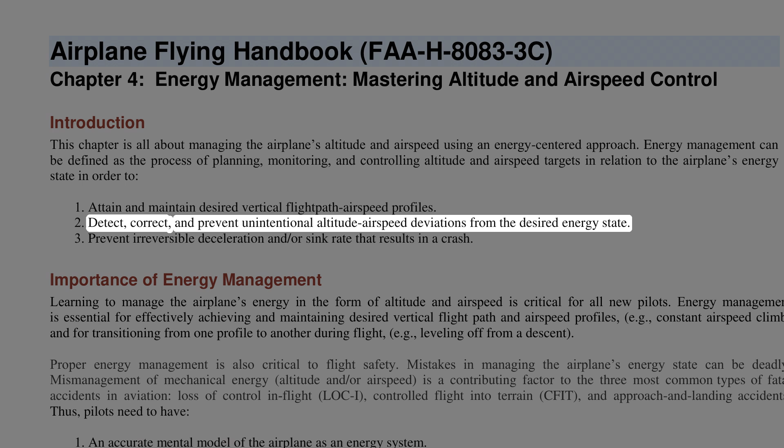Introduction. This chapter is all about managing the airplane's altitude and airspeed using an energy-centered approach. Energy management can be defined as the process of planning, monitoring, and controlling altitude and airspeed targets in relation to the airplane's energy state, in order to attain and maintain desired vertical flight path and airspeed profiles, detect, correct, and prevent unintentional altitude and airspeed deviations from the desired energy state, and prevent irreversible deceleration and/or sink rate that results in a crash.

Importance of energy management. Learning to manage the airplane's energy in the form of altitude and airspeed is critical for all new pilots. Energy management is essential for effectively achieving and maintaining desired vertical flight path and airspeed profiles, e.g., constant airspeed climb, and for transitioning from one profile to another during flight, e.g., leveling off from a descent.

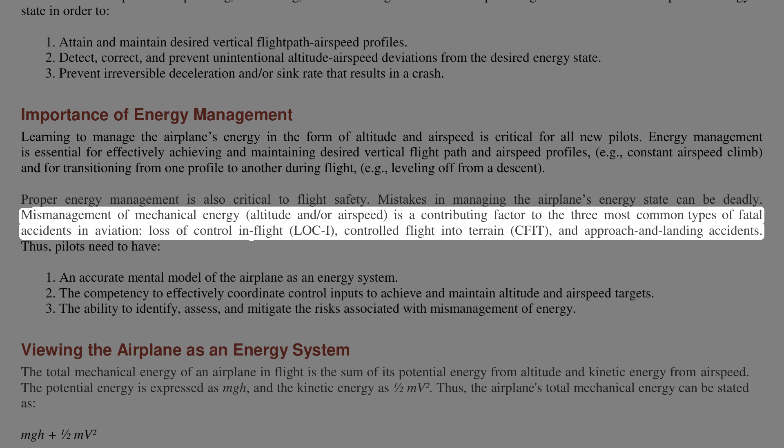Proper energy management is also critical to flight safety. Mistakes in managing the airplane's energy state can be deadly. Mismanagement of mechanical energy, altitude and/or airspeed, is a contributing factor to the three most common types of fatal accidents in aviation: loss of control in flight (LOC-I), controlled flight into terrain (CFIT), and approach and landing accidents.

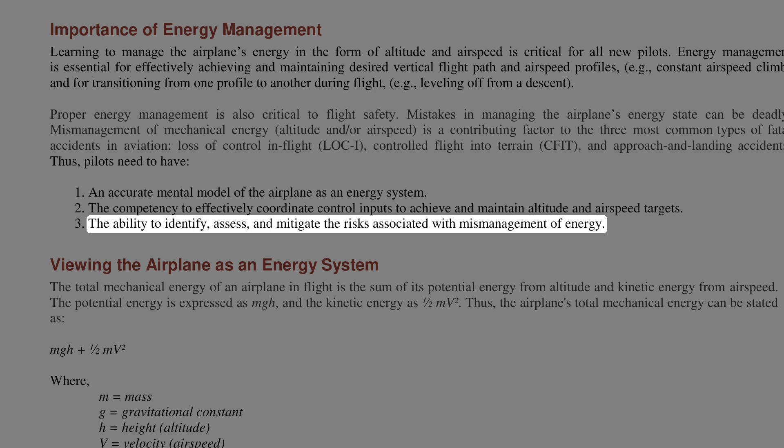Thus, pilots need to have: 1. An accurate mental model of the airplane as an energy system. 2. The competency to effectively coordinate control inputs to achieve and maintain altitude and airspeed targets. 3. The ability to identify, assess, and mitigate the risks associated with mismanagement of energy.

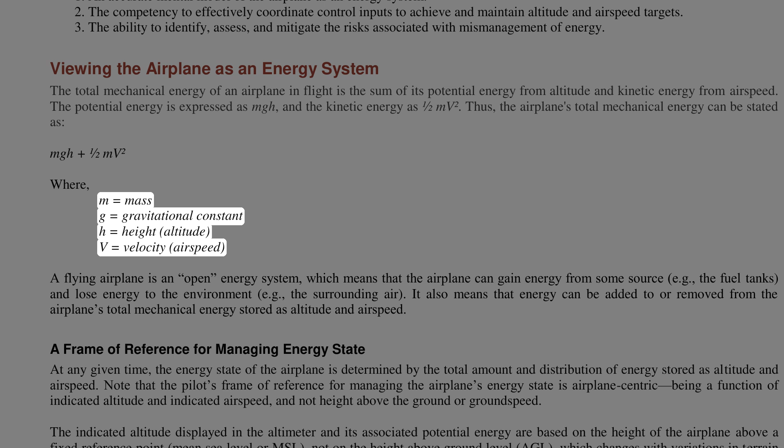Viewing the airplane as an energy system, the total mechanical energy of an airplane in flight is the sum of its potential energy from altitude and kinetic energy from airspeed. The potential energy is expressed as mgh, and the kinetic energy as half mv squared. Thus, the airplane's total mechanical energy can be stated as mgh plus half mv squared, where m equals mass, g equals gravitational constant, h equals height (altitude), and v equals velocity (airspeed).

A flying airplane is an open energy system, which means that the airplane can gain energy from some source, e.g., the fuel tanks, and lose energy to the environment, e.g., the surrounding air. It also means that energy can be added to or removed from the airplane's total mechanical energy stored as altitude and airspeed. A frame of reference for managing energy state.

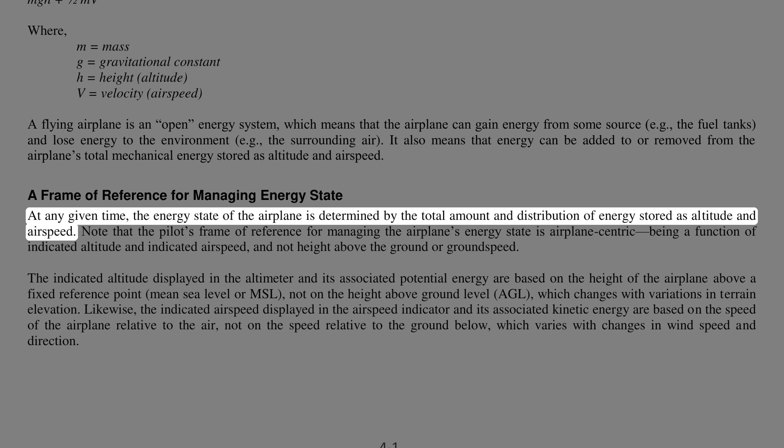At any given time, the energy state of the airplane is determined by the total amount and distribution of energy stored as altitude and airspeed. Note that the pilot's frame of reference for managing the airplane's energy state is airplane-centric, being a function of indicated altitude and indicated airspeed, and not height above the ground or ground speed.

The indicated altitude displayed in the altimeter and its associated potential energy are based on the height of the airplane above a fixed reference point, mean sea level or MSL, not on the height above ground level, AGL, which changes with variations in terrain elevation.

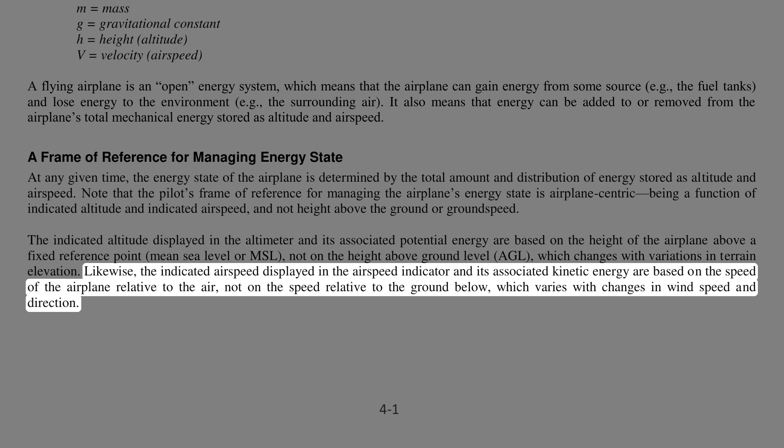Likewise, the indicated airspeed displayed in the airspeed indicator and its associated kinetic energy are based on the speed of the airplane relative to the air, not on the speed relative to the ground below, which varies with changes in wind speed and direction. Note that changes in indicated altitude and airspeed are attained through forces resulting from the pilot's direct manipulation of the controls.

These direct control inputs determine the airplane's ability to climb, descend, accelerate, or decelerate. In contrast, changes in AGL altitude and ground speed are affected by external factors, such as varying terrain elevation and wind, which the pilot cannot alter.

Of course, the pilot should manipulate the airplane's energy in such a way as to minimize any risks associated with terrain or wind. For example, the pilot may seek to manipulate energy state so as to maximize the airplane's energy gains and minimize energy losses when faced with rising terrain. A safer heading may also be an option.

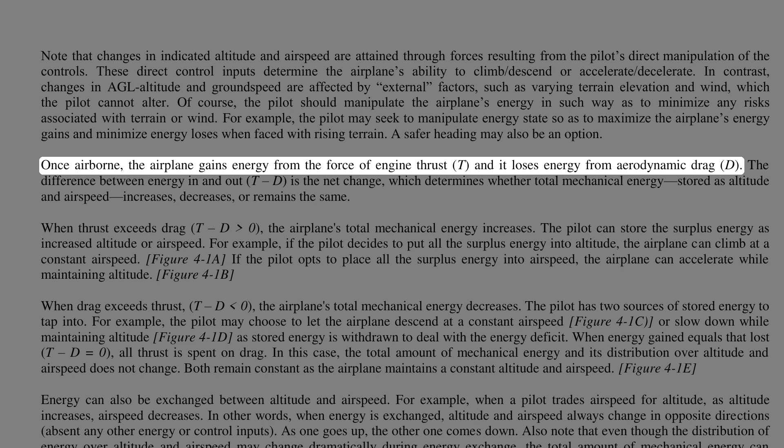Once airborne, the airplane gains energy from the force of engine thrust, T, and it loses energy from aerodynamic drag, D. The difference between energy in and out, T minus D, is the net change, which determines whether total mechanical energy, stored as altitude and airspeed, increases, decreases, or remains the same.

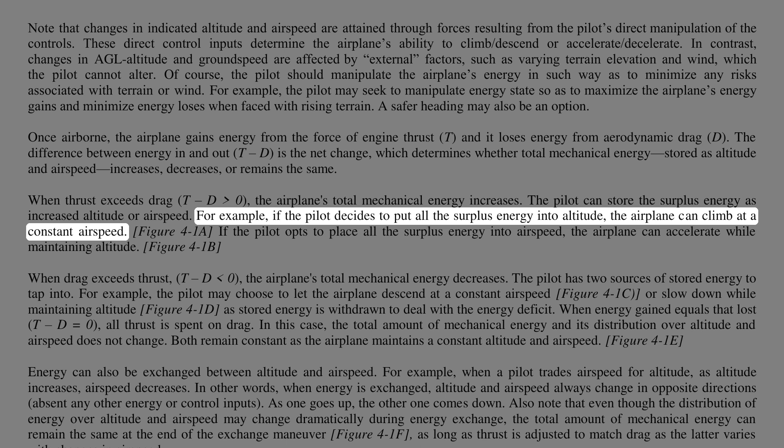When thrust exceeds drag, T minus D greater than 0, the airplane's total mechanical energy increases. The pilot can store the surplus energy as increased altitude or airspeed. For example, if the pilot decides to put all the surplus energy into altitude, the airplane can climb at a constant airspeed. If the pilot opts to place all the surplus energy into airspeed, the airplane can accelerate while maintaining altitude.

When drag exceeds thrust, T minus D is less than zero, the airplane's total mechanical energy decreases. The pilot has two sources of stored energy to tap into. For example, the pilot may choose to let the airplane descend at a constant airspeed, or slow down while maintaining altitude, as stored energy is withdrawn to deal with the energy deficit.

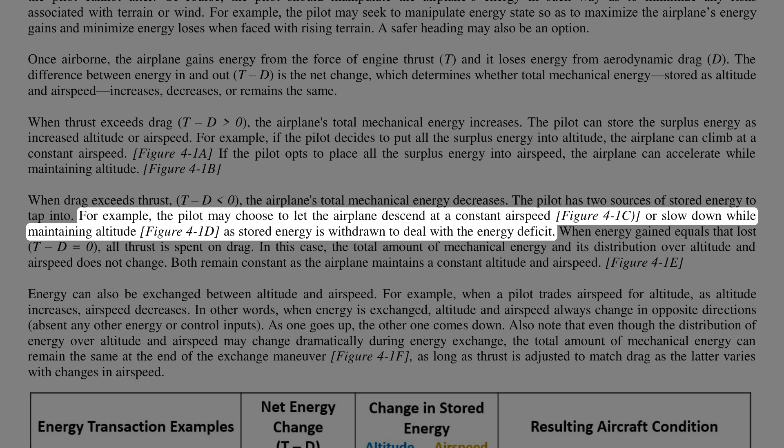When energy gained equals that lost, T minus D equals zero, all thrust is spent on drag. In this case, the total amount of mechanical energy and its distribution over altitude and airspeed does not change. Both remain constant as the airplane maintains a constant altitude and airspeed.

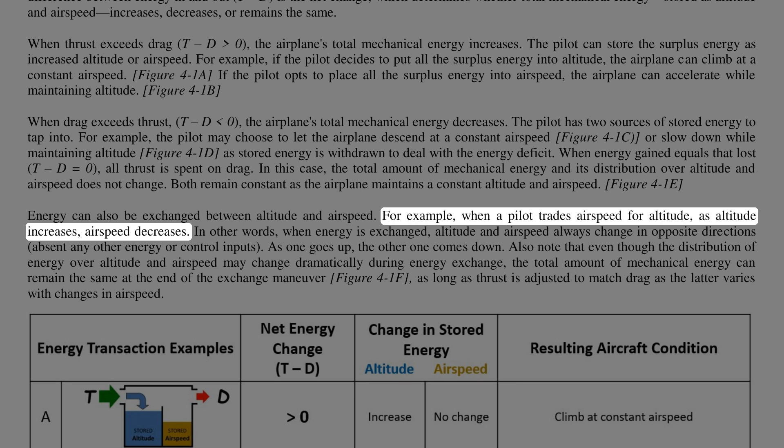Energy can also be exchanged between altitude and airspeed. For example, when a pilot trades airspeed for altitude, as altitude increases, airspeed decreases. In other words, when energy is exchanged, altitude and airspeed always change in opposite directions, absent any other energy or control inputs. As one goes up, the other one comes down.

Also note that even though the distribution of energy over altitude and airspeed may change dramatically during energy exchange, the total amount of mechanical energy can remain the same at the end of the exchange maneuver, as long as thrust is adjusted to match drag as the latter varies with changes in airspeed.

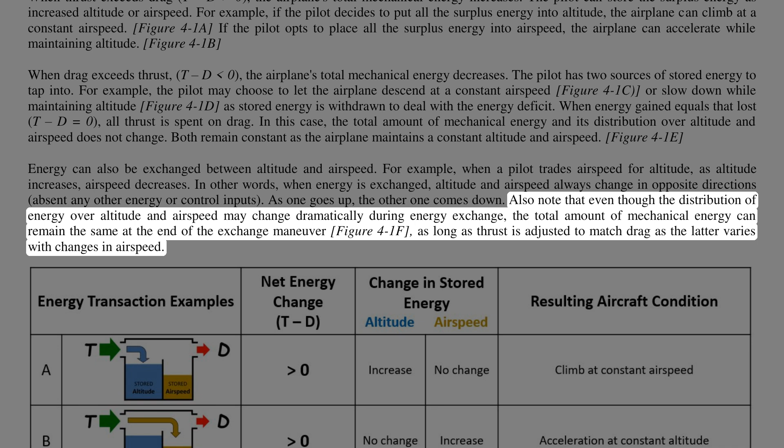Since the airplane gains energy from engine thrust, T, and loses energy through aerodynamic drag, D, energy flows continuously into and out of the airplane while in flight. Usually measured as specific excess power, Ps, or rate of energy change, the net energy flow is a direct function of the difference between thrust and drag.

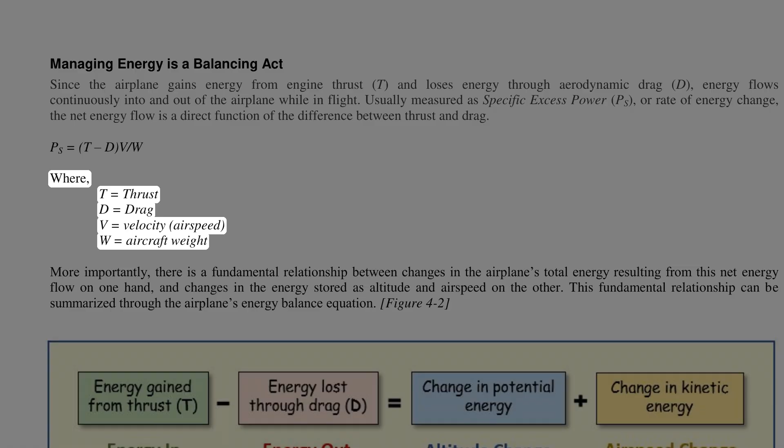Ps equals (T minus D) times V divided by W, where T equals thrust, D equals drag, V equals velocity or airspeed, W equals aircraft weight. More importantly, there is a fundamental relationship between changes in the airplane's total energy resulting from this net energy flow on one hand, and changes in the energy stored as altitude and airspeed on the other.

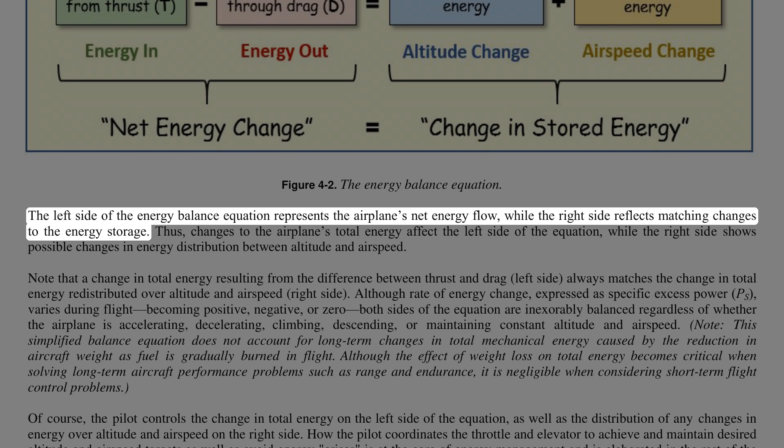This fundamental relationship can be summarized through the airplane's energy balance equation. The left side of the energy balance equation represents the airplane's net energy flow, while the right side reflects matching changes to the energy storage.

Thus, changes to the airplane's total energy affect the left side of the equation, while the right side shows possible changes in energy distribution between altitude and airspeed. Note that a change in total energy resulting from the difference between thrust and drag, left side, always matches the change in total energy redistributed over altitude and airspeed, right side.

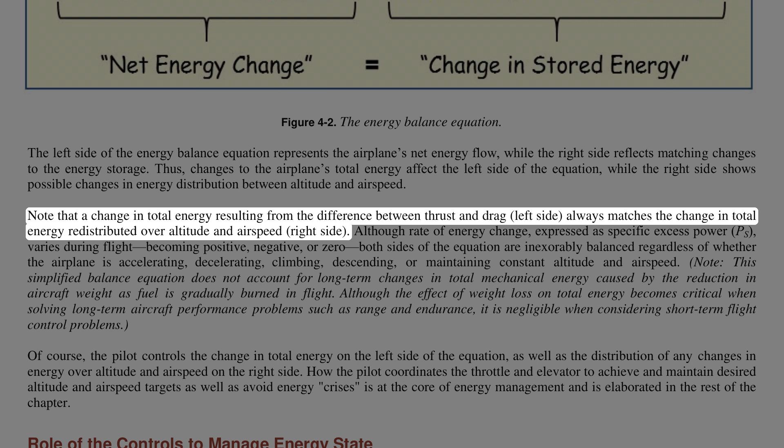Although rate of energy change, expressed as specific excess power, Ps, varies during flight, becoming positive, negative, or zero, both sides of the equation are inexorably balanced regardless of whether the airplane is accelerating, decelerating, climbing, descending, or maintaining constant altitude and airspeed. Note: this simplified balance equation does not account for long-term changes in total mechanical energy caused by

the reduction in aircraft weight as fuel is gradually burned in flight. Although the effect of weight loss on total energy becomes critical when solving long-term aircraft performance problems such as range and endurance, it is negligible when considering short-term flight control problems.

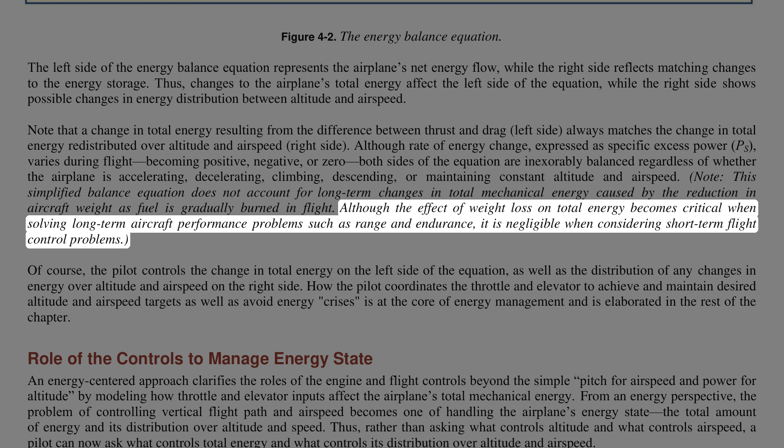Of course, the pilot controls the change in total energy on the left side of the equation, as well as the distribution of any changes in energy over altitude and airspeed on the right side. How the pilot coordinates the throttle and elevator to achieve and maintain desired altitude and airspeed targets, as well as avoid energy crises, is at the core of energy management and is elaborated in the rest of the chapter.

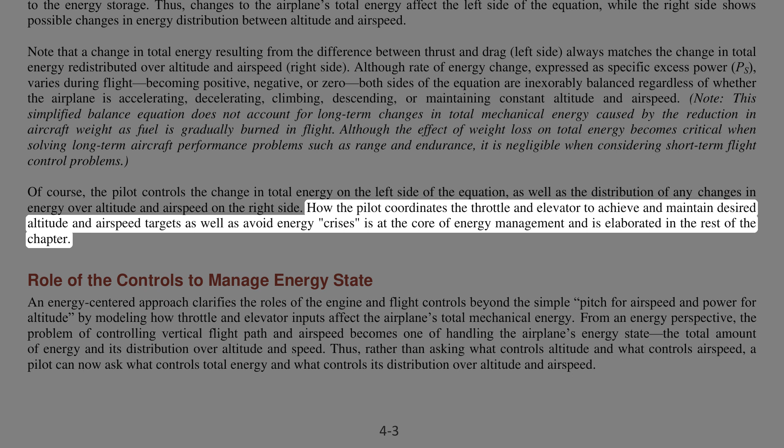Role of the controls to manage energy state.

An energy-centered approach clarifies the roles of the engine and flight controls beyond the simple pitch-for-airspeed and power-for-altitude model, by modeling how throttle and elevator inputs affect the airplane's total mechanical energy. From an energy perspective, the problem of controlling vertical flight path and airspeed becomes one of handling the airplane's energy state, the total amount of energy and its distribution over altitude and speed.

Thus, rather than asking what controls altitude and what controls airspeed, a pilot can now ask what controls total energy and what controls its distribution over altitude and airspeed.

Primary energy role of the throttle and elevator.

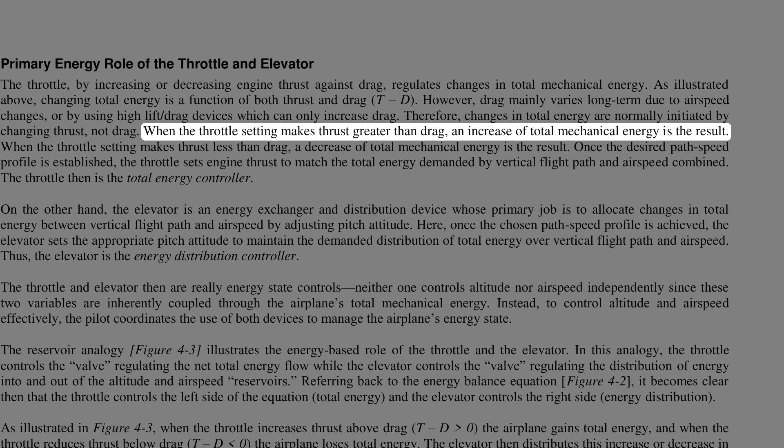The throttle, by increasing or decreasing engine thrust against drag, regulates changes in total mechanical energy. As illustrated above, changing total energy is a function of both thrust and drag, T minus D. However, drag mainly varies long-term due to airspeed changes or by using high-lift drag devices, which can only increase drag. Therefore, changes in total energy are normally initiated by changing thrust, not drag. When the throttle setting makes thrust greater than drag, an increase of total mechanical energy is the result.

When the throttle setting makes thrust less than drag, a decrease of total mechanical energy is the result. Once the desired path speed profile is established, the throttle sets engine thrust to match the total energy demanded by vertical flight path and airspeed combined. The throttle then is the total energy controller.

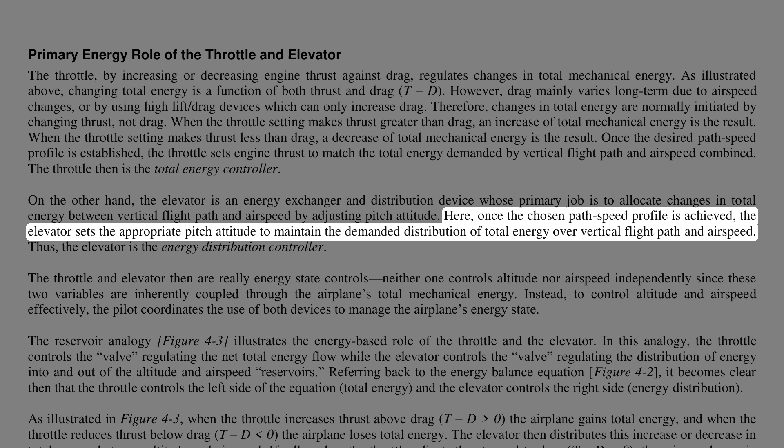On the other hand, the elevator is an energy exchanger and distribution device whose primary job is to allocate changes in total energy between vertical flight path and airspeed by adjusting pitch attitude. Once the chosen path speed profile is achieved, the elevator sets the appropriate pitch attitude to maintain the demanded distribution of total energy over vertical flight path and airspeed. Thus, the elevator is the energy distribution controller.

The throttle and elevator then are really energy state controls. Neither one controls altitude nor airspeed independently, since these two variables are inherently coupled through the airplane's total mechanical energy. Instead, to control altitude and airspeed effectively, the pilot coordinates the use of both devices to manage the airplane's energy state. The reservoir analogy illustrates the energy-based role of the throttle and the elevator.

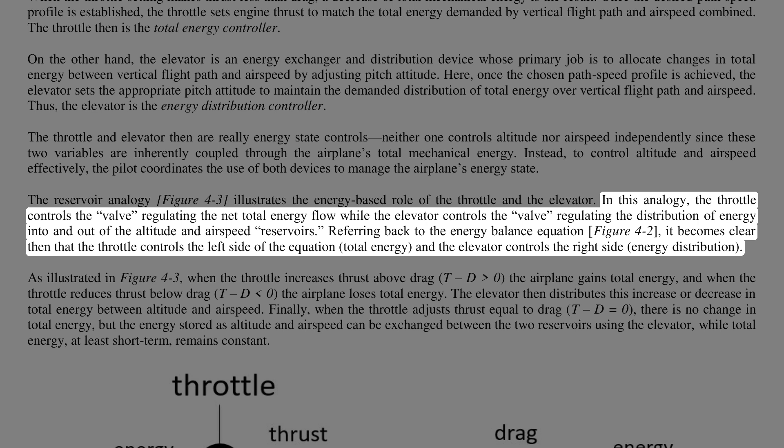In this analogy, the throttle controls the valve regulating the net total energy flow, while the elevator controls the valve regulating the distribution of energy into and out of the altitude and airspeed reservoirs. Referring back to the energy balance equation, figure 4-2, it becomes clear then that the throttle controls the left side of the equation, total energy, and the elevator controls the right side, energy distribution.

As illustrated in figure 4-3, when the throttle increases thrust above drag, T minus D greater than 0, the airplane gains total energy, and when the throttle reduces thrust below drag, T minus D less than 0, the airplane loses total energy. The elevator then distributes this increase or decrease in total energy between altitude and airspeed.

Finally, when the throttle adjusts thrust equal to drag, T minus D equals 0, there is no change in total energy, but the energy stored as altitude and airspeed can be exchanged between the two reservoirs using the elevator, while total energy, at least short-term, remains constant.

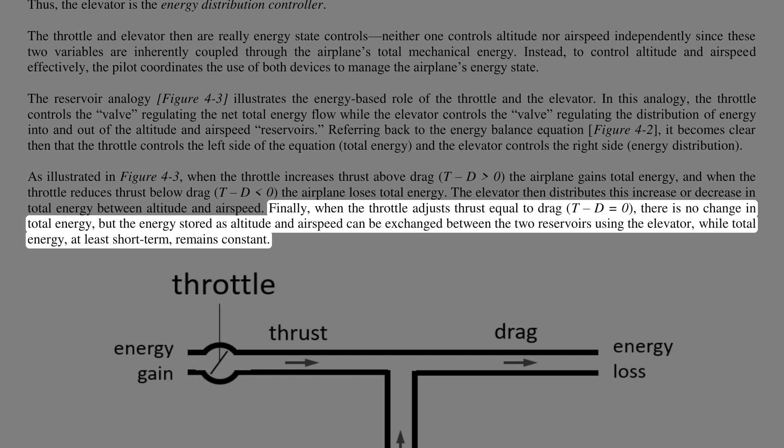Additional role for the elevator. On the front side of the power required curve, where the airplane cruises at high speed, point 1 in figure 4-4, and a low angle of attack, AOA, with little or no excess power or excess thrust.

In figure 4-4, pulling back on the yoke or stick, elevator up, will result in a brief energy exchange climb, causing the airplane to slow down from point 1 to point 2 toward the center of the power curve. This decrease in airspeed results in a reduction in total drag, hence available energy in the form of positive excess power, PS greater than 0, where thrust exceeds drag, T minus D greater than 0. With this excess power at point B in figure 4-4, the airplane can now climb at a constant airspeed or turn in level flight while maintaining a constant airspeed at an increased load factor.

On the backside of the power required curve, where the airplane flies at low speed, point 3 in figure 4-4, and high AOA with little or no excess power or excess thrust, point C in figure 4-4, pushing forward on the yoke or stick, elevator down, will result in a brief energy exchange descent, causing the airplane to accelerate from point 3 to point 2 toward the center of the power curve.

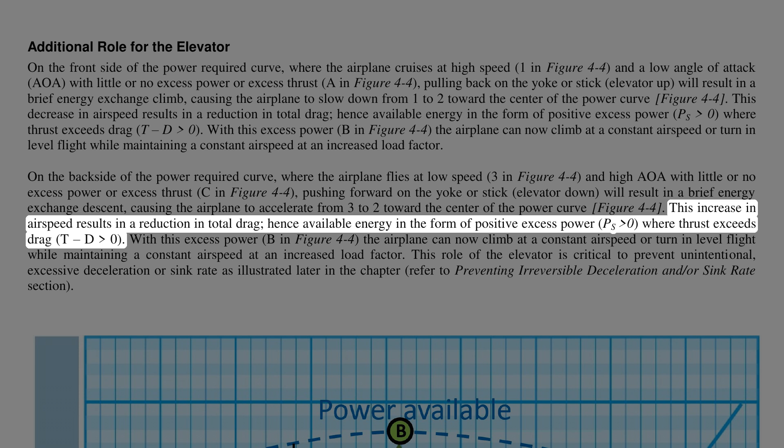This increase in airspeed results in a reduction in total drag, hence available energy in the form of positive excess power, PS greater than 0, where thrust exceeds drag, T minus D greater than 0.

While the elevator can assist the throttle in changing airspeed via energy exchange as described by T minus D and PS above, occasionally the elevator can directly increase the D in T minus D at any given speed during a level turn, thus helping the airplane rapidly bleed off total energy.

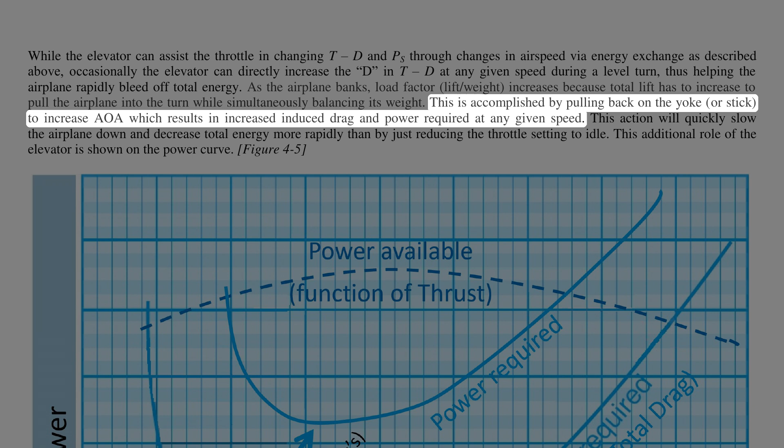As the airplane banks, load factor, lift over weight, increases because total lift has to increase to pull the airplane into the turn while simultaneously balancing its weight. This is accomplished by pulling back on the yoke or stick to increase AOA, which results in increased induced drag and power required at any given speed. This action will quickly slow the airplane down and decrease total energy more rapidly than by just reducing the throttle setting to idle. This additional role of the elevator is shown on the power curve.

Applying the respective role of the controls to manage the airplane's energy state leads to a set of simple rules for proper throttle elevator coordination to effectively control vertical flight path and airspeed.

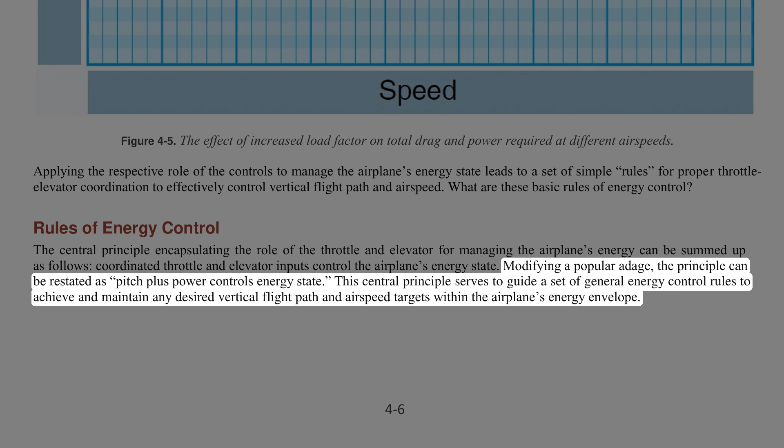What are these basic rules of energy control? The central principle encapsulating the role of the throttle and elevator for managing the airplane's energy can be summed up as follows: coordinated throttle and elevator inputs control the airplane's energy state. Modifying a popular adage, the principle can be restated as pitch plus power controls energy state. This central principle guides a set of general energy control rules to achieve and maintain any desired vertical flight path and airspeed targets within the airplane's energy envelope.

Visualizing the airplane's ability to move between energy states. To better understand the basic rules of energy control, a pilot needs to visualize an airplane's energy state and its ability to switch from one energy state to another. In other words, how does an airplane move from an initial altitude and airspeed to any other target altitude and airspeed within its flight envelope, and how does the pilot control the process?

A map should help, and in this case, it charts the status of the aircraft in terms of energy. In a navigation map, such as an aeronautical sectional chart, the geographic position of an airplane is determined by two variables, latitude and longitude. Likewise, in an altitude-airspeed, or energy, map, the energy position of an airplane, its energy state, is defined by two variables, altitude and airspeed.

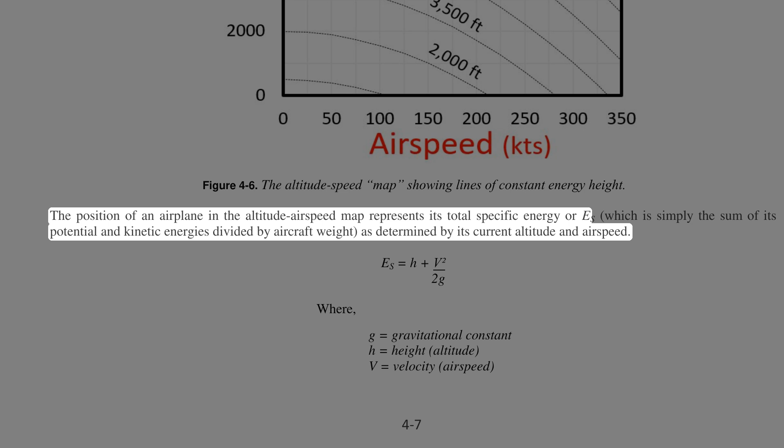The position of an airplane in the altitude-airspeed map represents its total specific energy, or Es, which is simply the sum of its potential and kinetic energies divided by aircraft weight, as determined by its current altitude and airspeed. Where G equals gravitational constant, H equals height (altitude), V equals velocity (airspeed). Since the total specific energy Es has the units of height, e.g. feet, it is usually called energy height. It also gets this name from the fact that energy height is the maximum height that an airplane would reach from its current altitude if it were to trade all its speed for altitude.

Figure 4-6 shows lines of constant total specific energy, or energy height. Different positions of an airplane along a given energy height line have the same total energy regardless of their location on the line, e.g., A and B. Thus, even though the airplane at point A is cruising at 100 knots and 6,000 feet, it has the same total specific energy, expressed in height, 6,500 feet, when cruising at 240 knots and 4,000 feet at point B. This also means that the airplane in either position, A or B, would be able to zoom to the same maximum altitude of 6,500 feet by trading all its speed for altitude.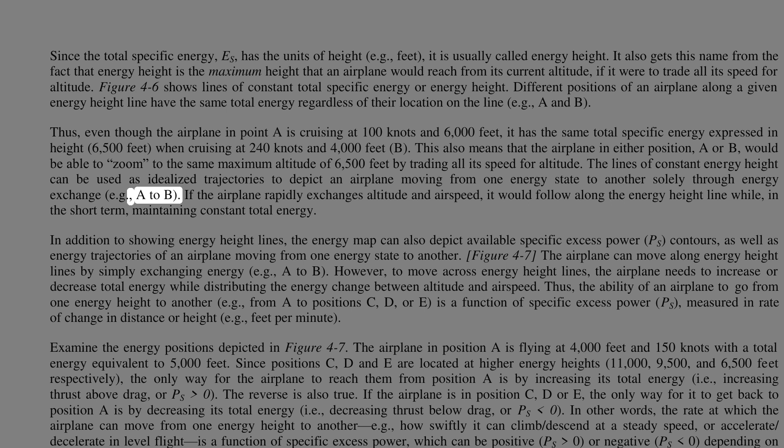The lines of constant energy height can be used as idealized trajectories to depict an airplane moving from one energy state to another solely through energy exchange, e.g., A to B. If the airplane rapidly exchanges altitude and airspeed, it would follow along the energy height line while, in the short term, maintaining constant total energy. In addition to showing energy height lines, the energy map can also depict available specific excess power contours, as well as energy trajectories of an airplane moving from one energy state to another. The airplane can move along energy height lines by simply exchanging energy, e.g., A to B. However, to move across energy height lines, the airplane needs to increase or decrease total energy while distributing the energy change between altitude and airspeed.

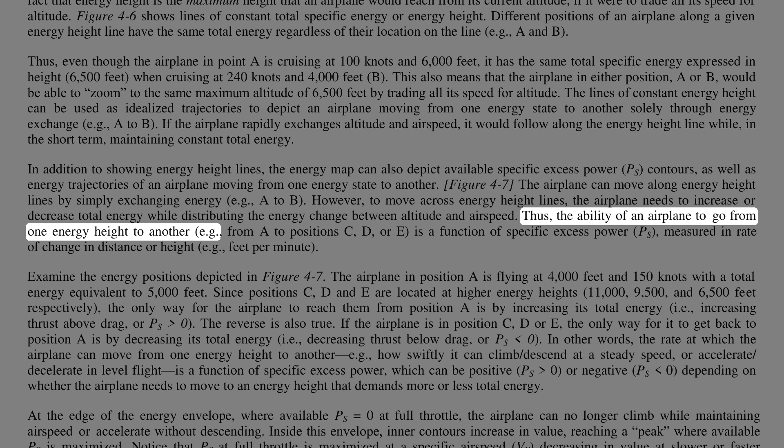Thus, the ability of an airplane to go from one energy height to another, e.g., from A to position C, D, or E, is a function of specific excess power, Ps, measured as a rate of change in distance or height, e.g. feet per minute. Examine the energy positions depicted in figure 4-7. The airplane in position A is flying at 4,000 feet and 150 knots with a total energy equivalent to 5,000 feet. Since positions C, D, and E are located at higher energy heights, 11,000, 9,500, and 6,500 feet respectively,

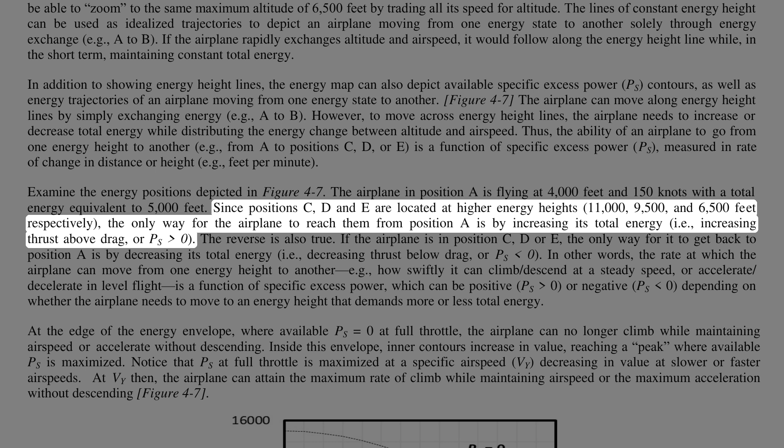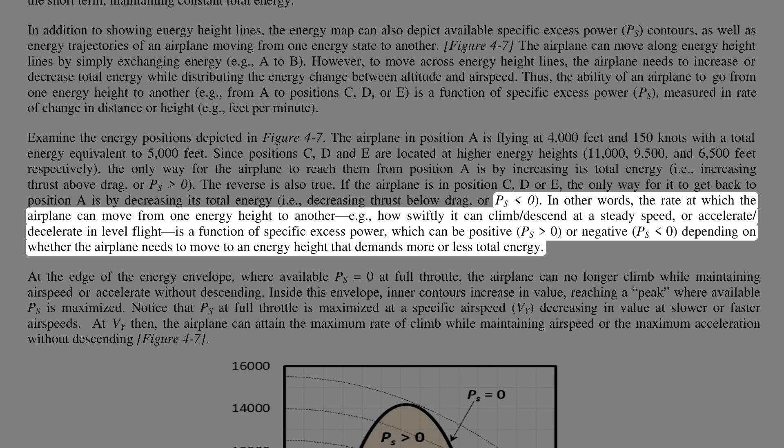the only way for the airplane to reach them from position A is by increasing its total energy, i.e., increasing thrust above drag, with specific excess power greater than zero. The reverse is also true: if the airplane is in position C, D, or E, the only way for it to get back to position A is by decreasing its total energy, i.e., decreasing thrust below drag, giving specific excess power less than zero. In other words, the rate at which the airplane can move from one energy height to another, e.g., how swiftly it can climb, descend at a steady speed, or accelerate, decelerate in level flight, is a function of specific excess power, which can be positive or negative, depending on whether the airplane needs to move to an energy height that demands more or less total energy.

At the edge of the energy envelope, where P available equals zero at full throttle, the airplane can no longer climb while maintaining airspeed or accelerate without descending. Inside this envelope, the inner contours increase in value, reaching a peak where available P is maximized, and decreasing in value at slower or faster airspeeds.

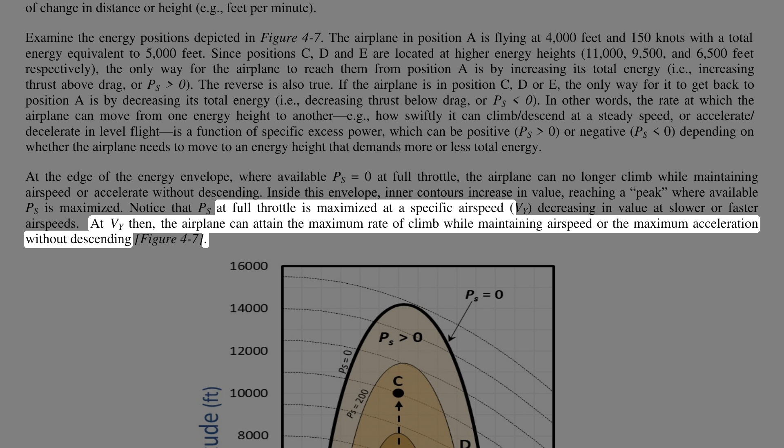An energy control map can help visualize the basic energy control rules. The energy control map depicts not only the trajectories of an airplane transitioning from an arbitrary initial energy state, 1, to other target states, 2, 3, 4, 5, 6, and 7, but also the changes in energy caused by the throttle, blue and red arrows, and the elevator, green arrows.

In other words, it allows pilots to visualize the basic control rules for moving an airplane from one state to another. The edge of the sustainable energy state envelope, where PS equals 0 at full throttle, is also illustrated.

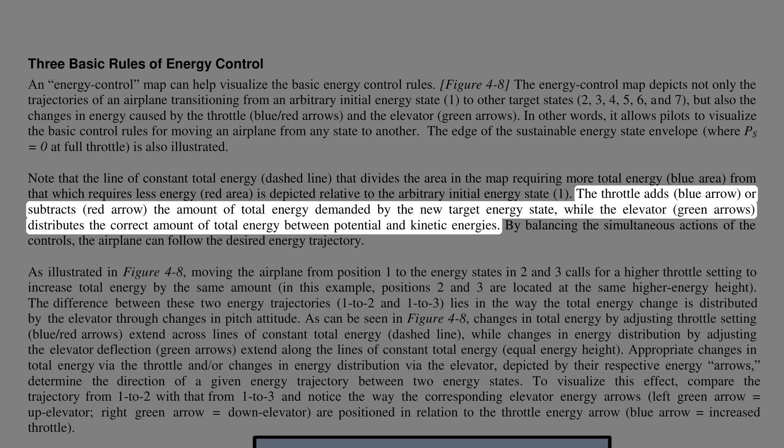Note that the line of constant total energy, the dashed line, divides the map into an area requiring more total energy, the blue area, from that which requires less energy, the red area, depicted relative to the arbitrary initial energy state, 1. The throttle adds, blue arrow, or subtracts, red arrow, the amount of total energy demanded by the new target energy state, while the elevator, green arrows, distributes the correct amount of total energy between potential and kinetic energy. By balancing the simultaneous actions of the controls, the airplane can follow the desired energy trajectory.

As illustrated in Figure 4-8, moving the airplane from position 1 to the energy states in 2 and 3 calls for a higher throttle setting to increase total energy by the same amount. In this example, positions 2 and 3 are located at the same higher energy height.

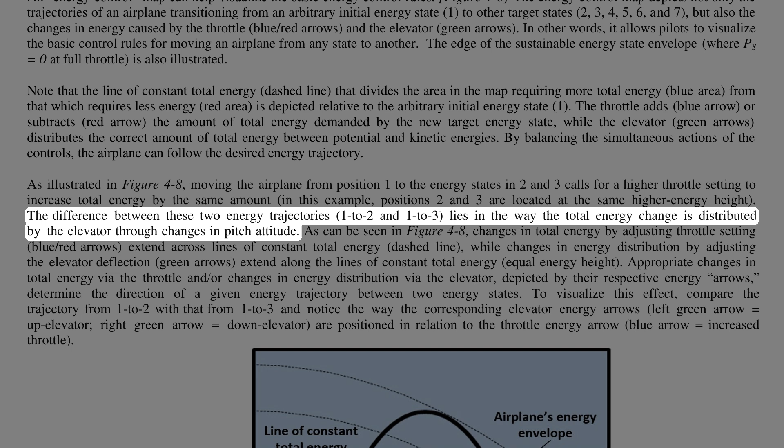The difference between these two energy trajectories, 1 to 2 and 1 to 3, lies in the way the total energy change is distributed by the elevator through changes in pitch attitude.

As can be seen in Figure 4-8, changes in total energy by adjusting throttle setting, blue and red arrows, extend across lines of constant total energy, the dashed line, while changes in energy distribution by adjusting elevator deflection, green arrows, extend along the lines of constant total energy, or equal energy height.

Appropriate changes in total energy via the throttle, and/or changes in energy distribution via the elevator, depicted by their respective energy arrows, determine the direction of a given energy trajectory between two energy states.

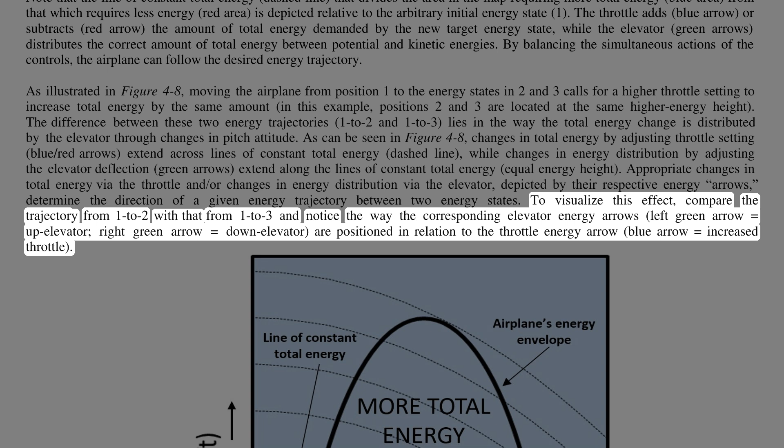To visualize this effect, compare the trajectory from 1 to 2 with that from 1 to 3, and notice the way the corresponding elevator energy arrows, left green arrow equals up elevator, right green arrow equals down elevator, are positioned in relation to the throttle energy arrow, blue arrow equals increased throttle.

Thus, transitioning to a higher altitude at a constant speed, 1 to 2, requires increased throttle and up elevator to stay on speed, while transitioning to a faster airspeed at a constant altitude, 1 to 3, demands increased throttle and gradual down elevator to stay on path. Retrimming is needed to relieve elevator control pressures.

Transitioning to a lower altitude at a constant speed, 1 to 4, requires decreased throttle and down elevator to stay on speed, while transitioning to a slower airspeed at a constant altitude, 1 to 5, demands decreased throttle and gradual up elevator to stay on path. Retrimming is needed to relieve elevator control pressures.

Finally, transitioning to a higher altitude by trading speed for altitude, 1 to 6, requires up elevator without initially changing throttle setting, while transitioning to a faster airspeed by trading altitude for speed, 1 to 7, requires down elevator without initially changing throttle setting. In both cases, at the end of the energy exchange maneuver, the elevator will need to be retrimmed and throttle setting adjusted to match drag at the new speed in order to maintain total energy constant while remaining at the new altitude airspeed target.

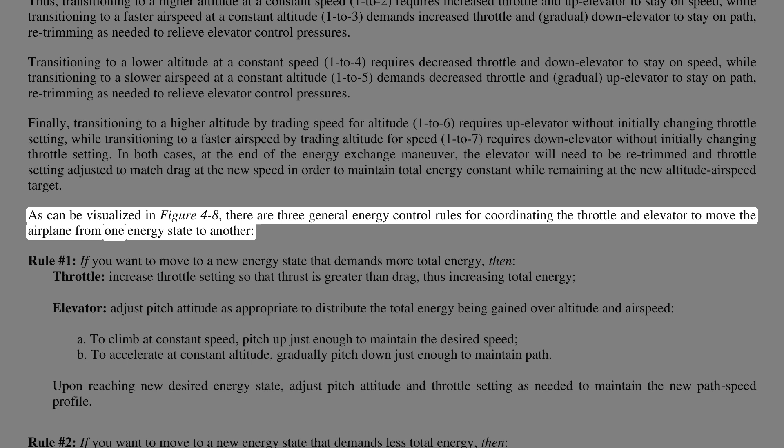As can be visualized in Figure 4-8, there are 3 general energy control rules for coordinating the throttle and elevator to move the airplane from one energy state to another. Rule number 1: if you want to move to a new energy state that demands more total energy, then use the throttle—increase throttle setting so that thrust is greater than drag, thus increasing total energy.

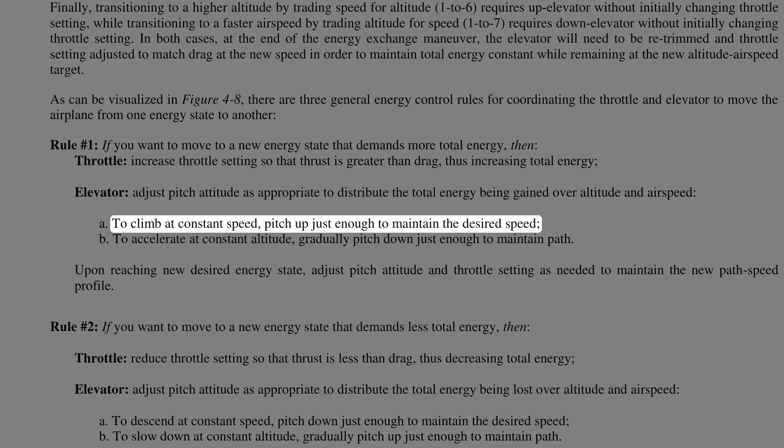Elevator: adjust pitch attitude as appropriate to distribute the total energy being gained over altitude and airspeed. To climb at constant speed, pitch up just enough to maintain the desired speed. To accelerate at constant altitude, gradually pitch down just enough to maintain path. Upon reaching the new desired energy state, adjust pitch attitude and throttle setting as needed to maintain the new path speed profile.

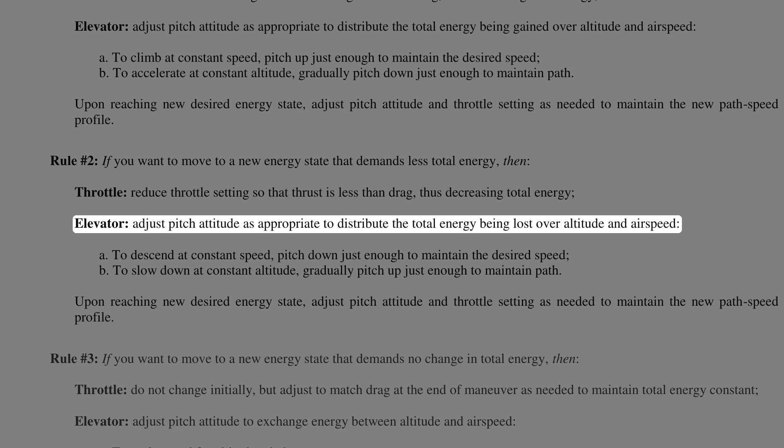Rule number 2: if you want to move to a new energy state that demands less total energy, reduce throttle settings so that thrust is less than drag, thus decreasing total energy. Adjust pitch attitude as appropriate to distribute the total energy being lost over altitude and airspeed. To descend at constant speed, pitch down just enough to maintain the desired speed. To slow down at constant altitude, gradually pitch up just enough to maintain path.

Mitigating risks from mismanagement of energy. Besides learning the proper use of the controls for normal energy management tasks, pilots should be equipped with the ability to identify, assess, and mitigate two major risks associated with mismanagement of energy: one, unwanted deviations from the desired energy state, and two, unintentional, irreversible deceleration and/or sink rate causing depletion of mechanical energy.

The first risk involves unintended altitude and airspeed deviations, referred to in the managing energy errors section. The second risk entails unforeseen, continuous airspeed and/or altitude loss coupled with little or no available excess power in a given flight condition, referred to in the preventing irreversible deceleration and/or sink rate section.

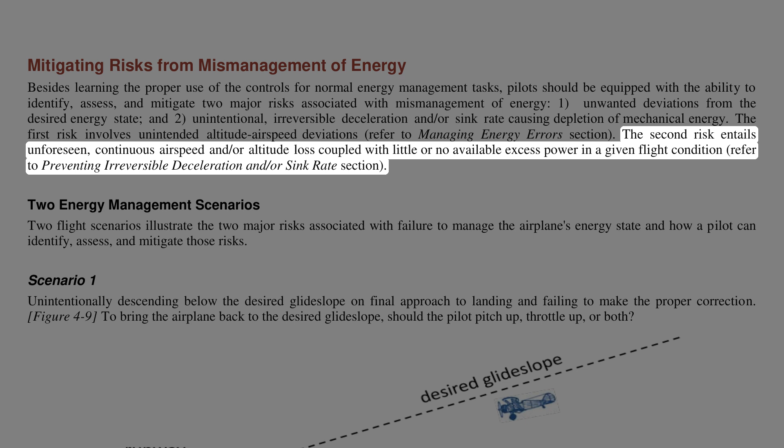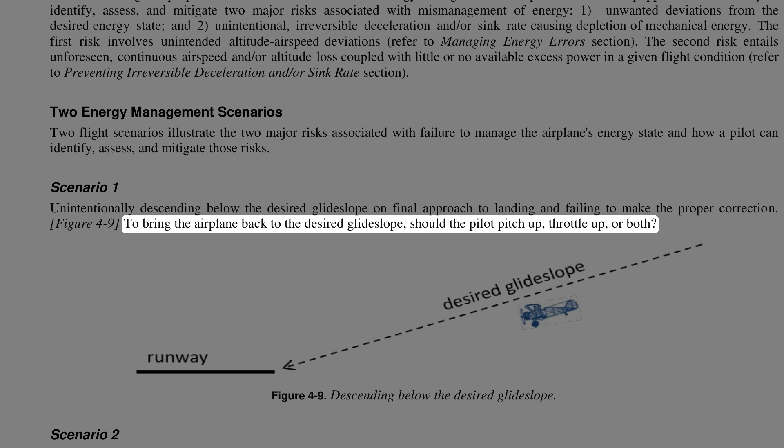Two energy management scenarios illustrate the two major risks associated with failure to manage the airplane's energy state and how a pilot can identify, assess, and mitigate those risks. Scenario 1: unintentionally descending below the desired glide slope on final approach to landing and failing to make the proper correction. To bring the airplane back to the desired glide slope, should the pilot pitch up, throttle up, or both?

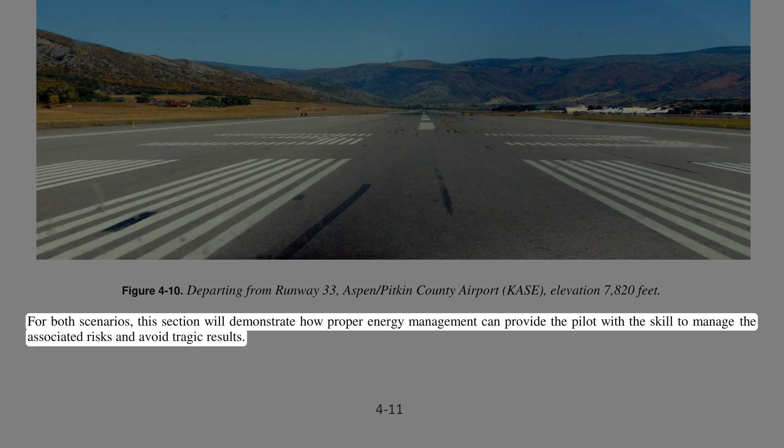Scenario 2: flying toward rising terrain and not being able to fly up and over it before impacting terrain. Note the rising terrain all along the departure corridor. What can the pilot do to prevent an impending crash? For both scenarios, this section will demonstrate how proper energy management can provide the pilot with the skill to manage the associated risks and avoid tragic results.

Managing energy errors. In addition to learning effective techniques for maintaining stabilized path speed profiles, e.g., tracking the glide slope, and transitioning from one profile to another during flight, e.g., leveling off from a descent, pilots should develop skills for managing unwanted deviations in vertical flight path and airspeed, returning the airplane to its target energy state.

Since many in-flight energy crises start as undetected, ignored or poorly managed path speed deviations, pilots need the skills to recognize, correct and prevent these deviations. Although the intention is to correct altitude and airspeed deviations, the pilot is always acting on the airplane's energy state. Thus, it is important to translate altitude speed deviations into energy errors.

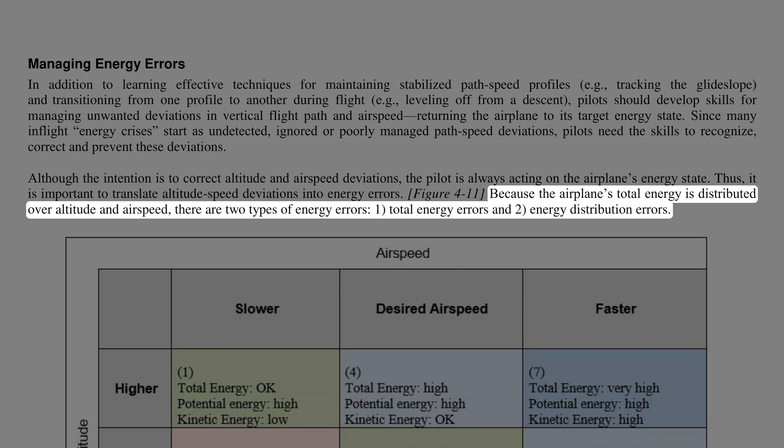Because the airplane's total energy is distributed over altitude and airspeed, there are two types of energy errors: one, total energy errors, and two, energy distribution errors. Monitoring the altimeter, or other flight path reference, and an airspeed indicator allows the pilot to distinguish these two types of energy errors.

In total energy errors, the airplane has too much energy, blue boxes, or too little energy, red boxes. The pilot will notice that altitude and speed deviate in the same direction, lower and slower, or higher and faster.

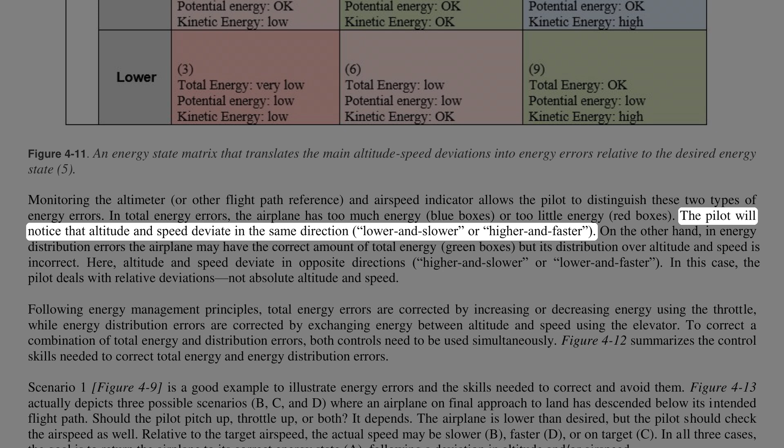On the other hand, in energy distribution errors, the airplane may have the correct amount of total energy, green boxes, but its distribution over altitude and speed is incorrect. Here, altitude and speed deviate in opposite directions, higher and slower, or lower and faster. In this case, the pilot deals with relative deviations, not absolute altitude and speed.

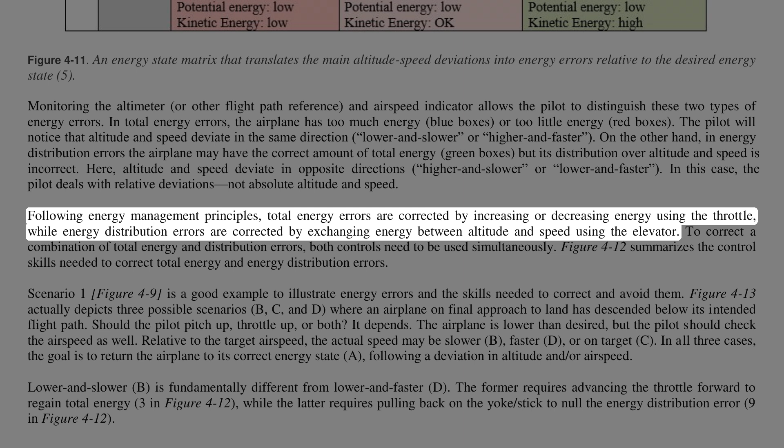Following energy management principles, total energy errors are corrected by increasing or decreasing energy using the throttle, while energy distribution errors are corrected by exchanging energy between altitude and speed using the elevator. To correct a combination of total energy and distribution errors, both controls need to be used simultaneously. Figure 4-12 summarizes the control skills needed to correct total energy and energy distribution errors.

Scenario 1 is a good example to illustrate energy errors and the skills needed to correct and avoid them. Figure 4-13 actually depicts three possible scenarios, B, C, and D, where an airplane on final approach to land has descended below its intended flight path. Should the pilot pitch up, throttle up, or both? It depends. The airplane is lower than desired, but the pilot should check the airspeed as well.

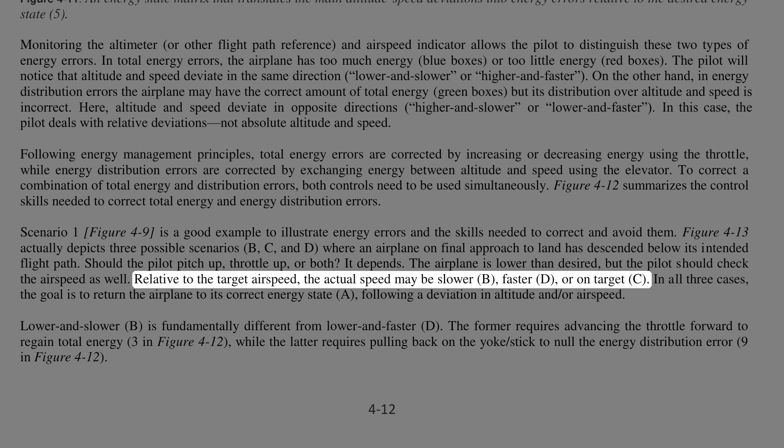Relative to the target airspeed, the actual speed may be slower, faster, or on target. In all 3 cases, the goal is to return the airplane to its correct energy state following a deviation in altitude and/or airspeed. Lower and slower is fundamentally different from lower and faster.

The former requires advancing the throttle forward to regain total energy, 3 in Figure 4-12, while the latter requires pulling back on the yoke stick to null the energy distribution error, 9 in Figure 4-12.

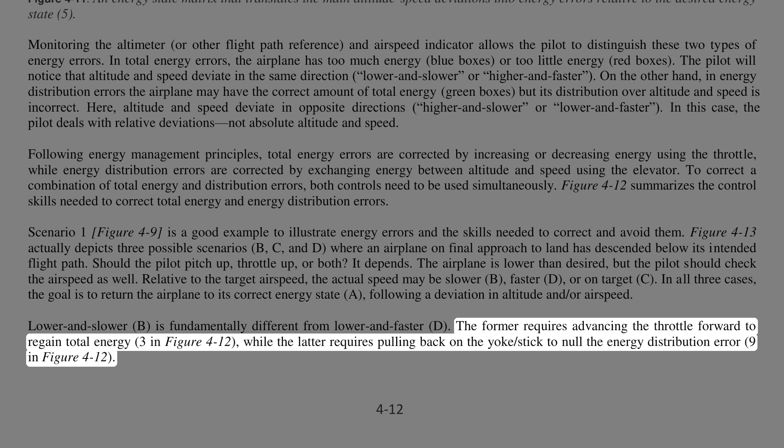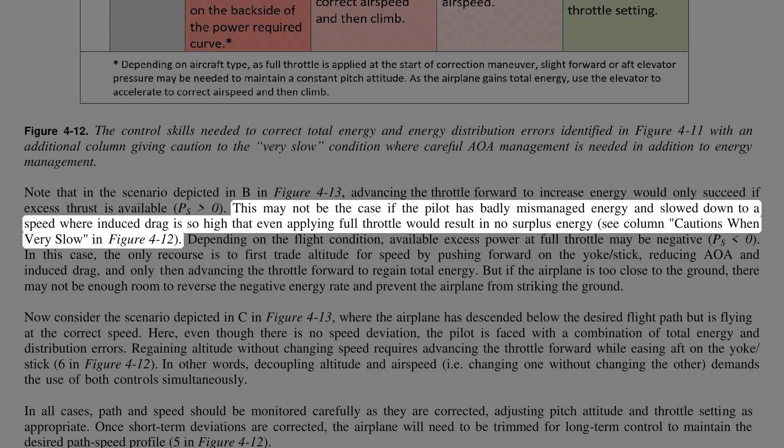Note that in the scenario depicted in B in Figure 4-13, advancing the throttle forward to increase energy would only succeed if excess thrust is available, P S greater than 0. This may not be the case if the pilot has badly mismanaged energy and slowed down to a speed where induced drag is so high that even applying full throttle would result in no surplus energy. See column, cautions when very slow, in Figure 4-12.

Depending on the flight condition, available excess power at full throttle may be negative, P S less than 0. In this case, the only recourse is to first trade altitude for speed by pushing forward on the yoke stick, reducing AOA and induced drag, and only then advancing the throttle forward to regain total energy.

But if the airplane is too close to the ground, there may not be enough room to reverse the negative energy rate and prevent the airplane from striking the ground.

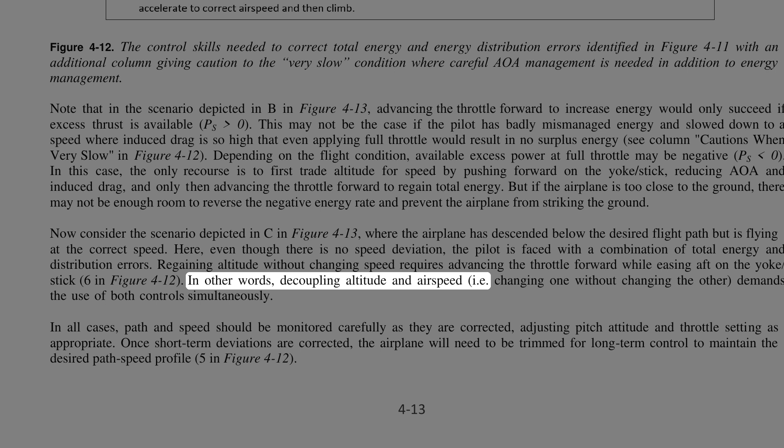Now consider the scenario depicted in C in Figure 4-13, where the airplane has descended below the desired flight path but is flying at the correct speed. Here, even though there is no speed deviation, the pilot is faced with a combination of total energy and distribution errors. Regaining altitude without changing speed requires advancing the throttle forward while easing aft on the yoke stick, 6 in Figure 4-12.

In other words, decoupling altitude and airspeed, i.e., changing one without changing the other, demands the use of both controls simultaneously. In all cases, path and speed should be monitored carefully as they are corrected, adjusting pitch attitude and throttle setting as appropriate. Once short-term deviations are corrected, the airplane will need to be trimmed for long-term control to maintain the desired path speed profile, 5 in Figure 4-12.

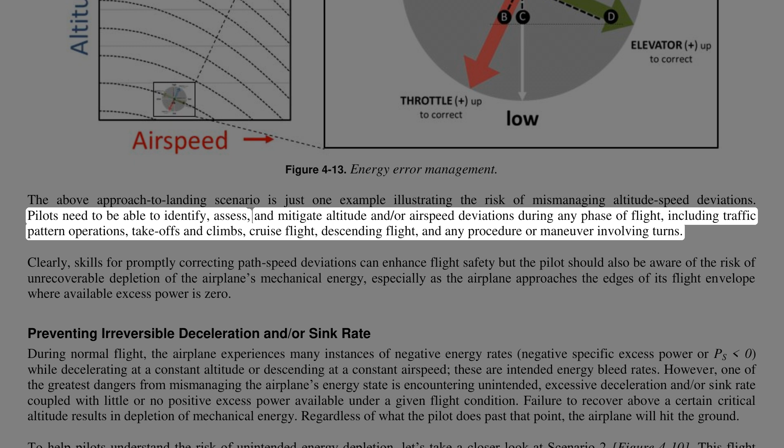The above approach to landing scenario is just one example illustrating the risk of mismanaging altitude speed deviations. Pilots need to be able to identify, assess, and mitigate altitude and/or airspeed deviations during any phase of flight, including traffic pattern operations, takeoffs and climbs, cruise flight, descending flight, and any procedure or maneuver involving turns.

Clearly, skills for promptly correcting path speed deviations can enhance flight safety, but the pilot should also be aware of the risk of unrecoverable depletion of the airplane's mechanical energy, especially as the airplane approaches the edges of its flight envelope where available excess power is zero.

Preventing irreversible deceleration and/or sink rate. During normal flight, the airplane experiences many instances of negative energy rates, negative specific excess power or PS less than zero, while decelerating at a constant altitude or descending at a constant airspeed. These are intended energy bleed rates.

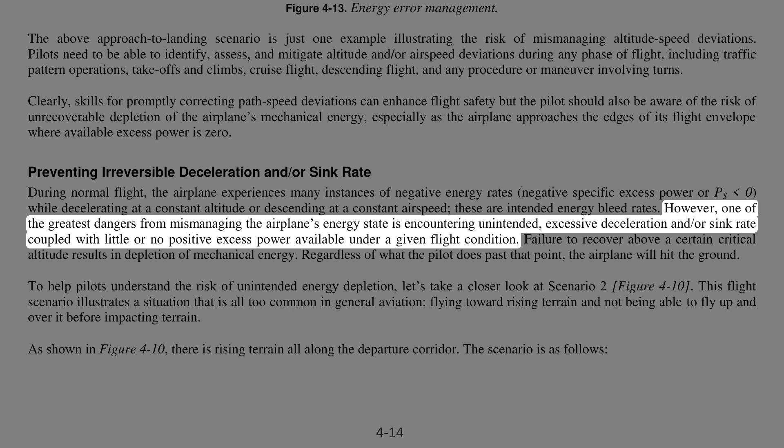However, one of the greatest dangers from mismanaging the airplane's energy state is encountering unintended, excessive deceleration and/or sink rate coupled with little or no positive excess power available under a given flight condition. Failure to recover above a certain critical altitude results in depletion of mechanical energy. Regardless of what the pilot does past that point, the airplane will hit the ground.

To help pilots understand the risk of unintended energy depletion, let's take a closer look at Scenario 2. This flight scenario illustrates a situation that is all too common in general aviation: flying toward rising terrain and not being able to fly up and over it before impacting terrain. As shown in Figure 4-10, there is rising terrain all along the departure corridor.

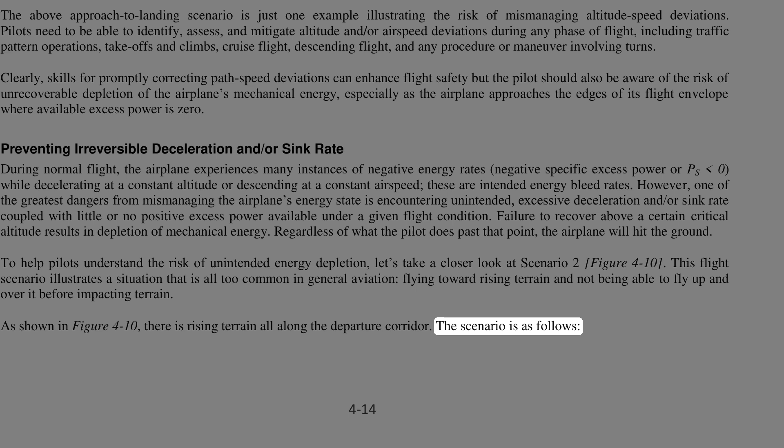The scenario is as follows. A pilot of a normally aspirated, twin-engine airplane departs out of Rocky Mountain Metropolitan Airport, KBJC, in the morning on a nice summer day and flies into Aspen, Pitkin County Airport, KASE. The pilot enjoys the scenery around Aspen, eats lunch, and decides to return home in the early hot afternoon.

The pilot departs KASE off of runway 33. At full throttle power, the airplane takes longer to accelerate but rotates at the normal speed. The pilot pitches to the normal pitch target, retracts the gear, and initiates a climb.

The pilot notices the airplane isn't performing as desired. The pilot checks to see if the gear is up and adjusts the mixtures to try and get a little more power.

The terrain is rising, the pilot gradually pitches up, and the airplane starts losing airspeed. The airplane quits climbing. The stall horn begins to sound.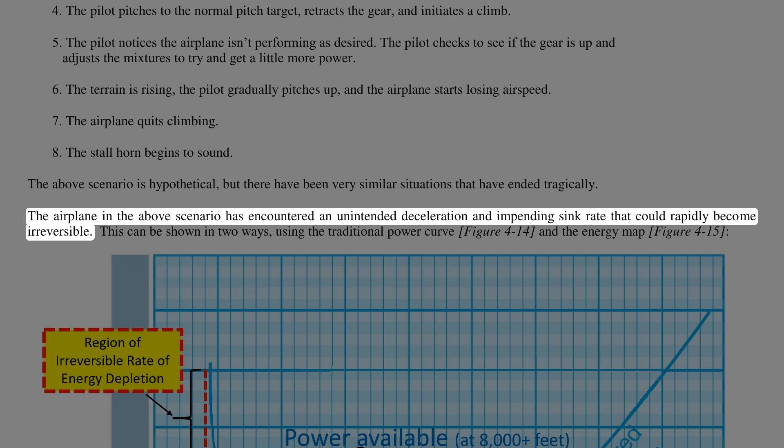The above scenario is hypothetical, but there have been very similar situations that have ended tragically. The airplane has encountered an unintended deceleration and impending sink rate that could rapidly become irreversible. This can be shown in two ways, using the traditional power curve and the energy map, Figure 4-15.

As illustrated in the airplane's power required and available curves, Figure 4-14, the airplane slows down, going from speed 1 where it is climbing, point A, power available greater than power required, to speed 2 where it stops climbing, point B, power available equal to power required, and continuing to speed 3 where the stall horn sounds, point C, power available less than power required.

The energy map, Figure 4-15, tells the same story from a total mechanical energy standpoint. The airplane has positive Ps at point 1 and climbs to point 2 where it stops climbing since Ps equals 0, then continues to point 3, where Ps is less than 0 and the stall horn sounds.

The question then is, what does the pilot do to recover from this predicament? The answer is proper energy management. The airplane needs to move to a different place on the energy map that will allow the airplane to begin climbing. So, what does that mean?

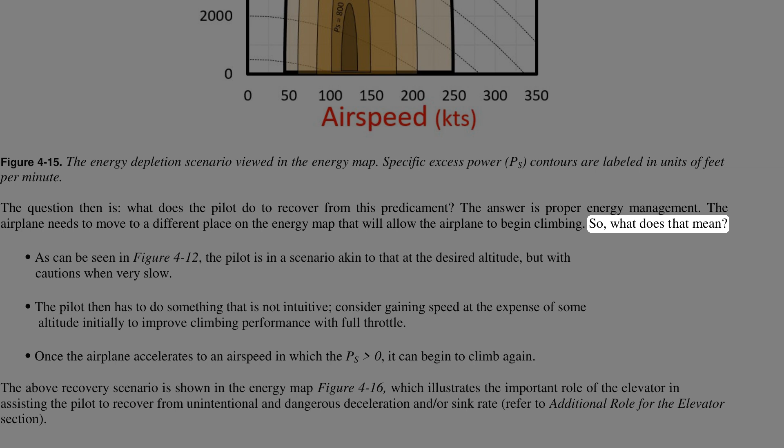As can be seen in Figure 4-12, the pilot is in a scenario akin to that at the desired altitude, but with cautions when very slow. The pilot then has to do something that is not intuitive. Consider gaining speed at the expense of some altitude initially to improve climbing performance with full throttle.

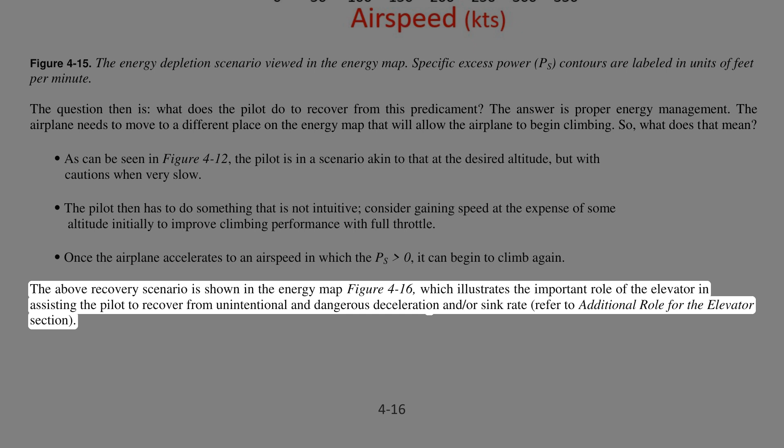Once the airplane accelerates to an airspeed in which Ps is greater than 0, it can begin to climb again. The above recovery scenario is shown in the energy map Figure 4-16, which illustrates the important role of the elevator in assisting the pilot to recover from unintentional and dangerous deceleration and/or sink rate, referring to the additional role for the elevator section.

The airplane needs to gain speed at the expense of some altitude, moving from point 3 where the Ps is less than 0. The airplane can then initiate a constant airspeed climb to point 5, at the desired target altitude and airspeed. Note that the desired target climb airspeed in the presence of rising terrain may be a slightly slower Vx than the speed for best rate of climb, and will result in a lower climb rate but steepest climb angle.

Once the airplane has recovered from the unintentional airspeed loss and begins climbing, the pilot should assess the situation and make an important decision regarding Vx, the speed for best angle of climb, to mitigate further risk, either continue climbing or do something else.

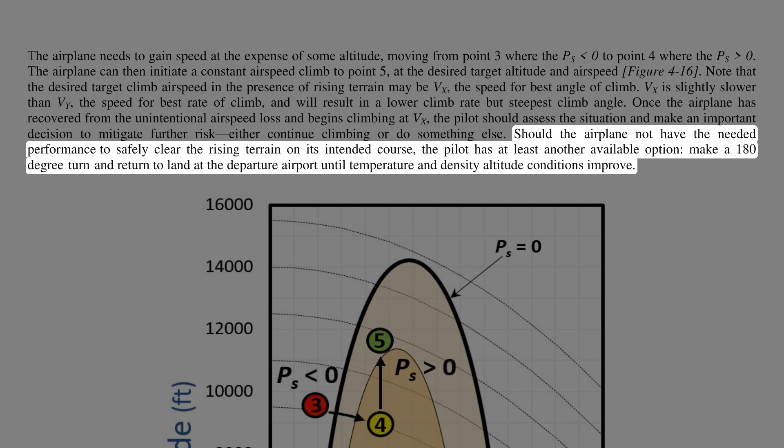Should the airplane not have the needed performance to safely clear the rising terrain on its intended course, the pilot has at least another available option. Make a 180-degree turn and return to land at the departure airport until temperature and density altitude conditions improve.

The above rising terrain scenario is just one example illustrating the risk of irreversible deceleration and/or sink rate. Pilots need to be aware that unintentional depletion of mechanical energy can happen in various instances, especially as the airplane approaches the slow edge of its energy envelope at low altitude, where available specific excess power, Ps, is 0. Examples include unstable, slow approaches to landing, high drag go-arounds where the pilot neglects to raise the gear and/or flaps, and steeper than normal turns in the traffic pattern.

Note that irreversible sink rates do not necessarily involve exceeding the critical angle of attack resulting in a stall and spin. The airplane can be unstalled and still experience unrecoverable sink rates near the high speed edge of its energy envelope, where available specific excess power, Ps, is also 0.

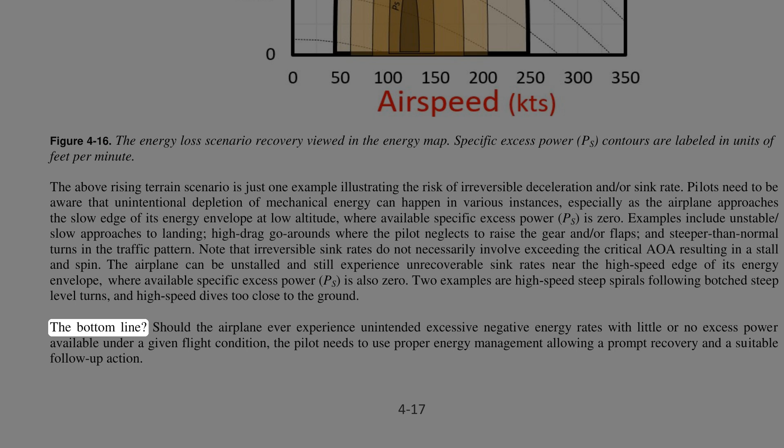Two examples are high speed steep spirals following botched steep level turns, and high speed dives too close to the ground. The bottom line: should the airplane ever experience unintended excessive negative energy rates with little or no excess power available under a given flight condition, the pilot needs to use proper energy management, allowing a prompt recovery and a suitable follow-up action.

Review of terms and definitions. The terms and definitions specific to this chapter appear below.

Aircraft energy management: the process of planning, monitoring and controlling altitude and airspeed targets in relation to the airplane's energy state. Note that this definition is concerned with managing mechanical energy, altitude and airspeed, and addresses the safety, flight control, side of energy management.

It does not address the efficiency, aircraft performance, side of energy management, which is concerned with how efficiently the engine generates mechanical energy from fuel and how efficiently the airframe spends that energy in flight. Energy system: a flying airplane is an open energy system.

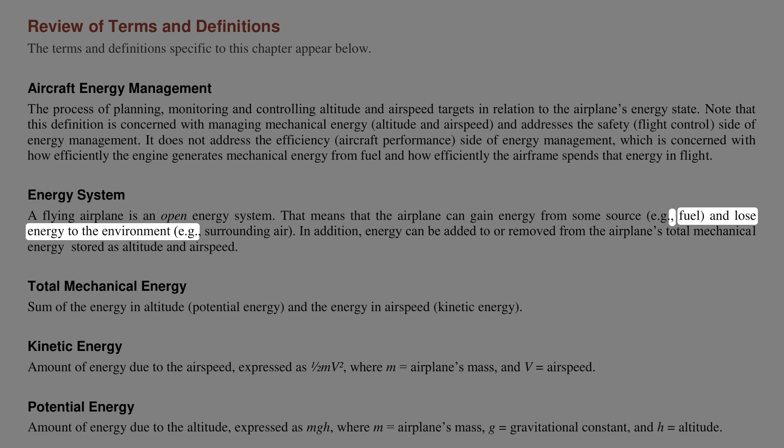That means the airplane can gain energy from some source, e.g., fuel, and lose energy to the environment, e.g., surrounding air. In addition, energy can be added to or removed from the airplane's total mechanical energy stored as altitude and airspeed. Total mechanical energy: sum of the energy in altitude, potential energy, and the energy in airspeed, kinetic energy.

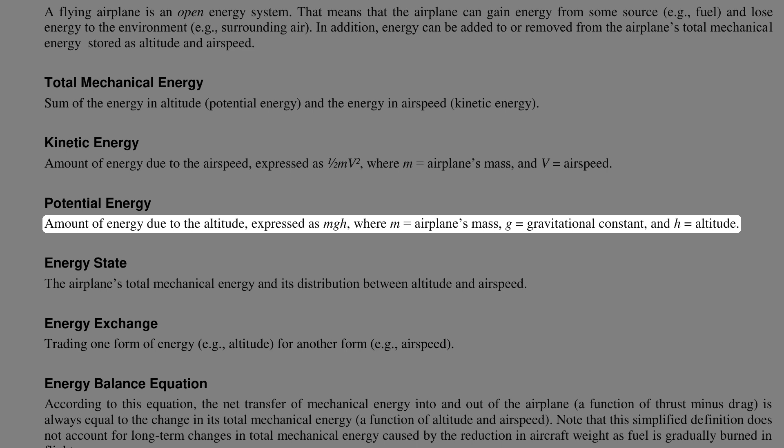Kinetic energy: amount of energy due to the airspeed, expressed as half mv squared, where m equals airplane's mass, and v equals airspeed. Potential energy: amount of energy due to the altitude, expressed as mgh, where m equals airplane's mass, g equals gravitational constant, and h equals altitude.

Energy state: the airplane's total mechanical energy and its distribution between altitude and airspeed. Energy exchange: trading one form of energy, e.g., altitude, for another form, e.g., airspeed.

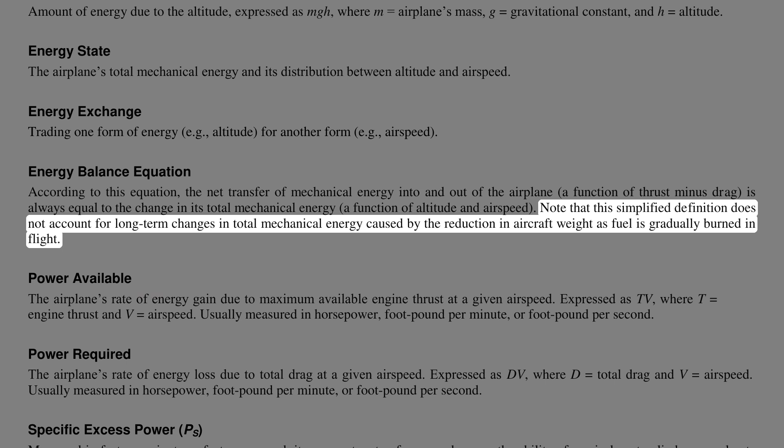Energy balance equation: according to this equation, the net transfer of mechanical energy into and out of the airplane, a function of thrust minus drag, is always equal to the change in its total mechanical energy, a function of altitude and airspeed. Note that this simplified definition does not account for long-term changes in total mechanical energy caused by the reduction in aircraft weight as fuel is gradually burned in flight.

Power available: the airplane's rate of energy gain due to maximum available engine thrust at a given airspeed. Expressed as TV, where T equals engine thrust and V equals airspeed. Usually measured in horsepower, foot-pound per minute, or foot-pound per second.

Power required: the airplane's rate of energy loss due to total drag at a given airspeed. Expressed as dV, where d equals total drag and v equals airspeed.

Energy height or total specific energy, ES. Measured in units of height, e.g., feet, it represents the airplane's total energy per unit weight. It is found by dividing the sum of potential energy and kinetic energy by the airplane's weight. It also represents the maximum height that an airplane would reach from its current altitude, if it were to trade all its speed for altitude.

Energy error: an altitude and/or airspeed deviation from an intended target, expressed in terms of energy. Depending on the airplane's total amount of energy and its distribution between altitude and airspeed, energy errors are classified as total energy errors, energy distribution errors, or a combination of both errors.

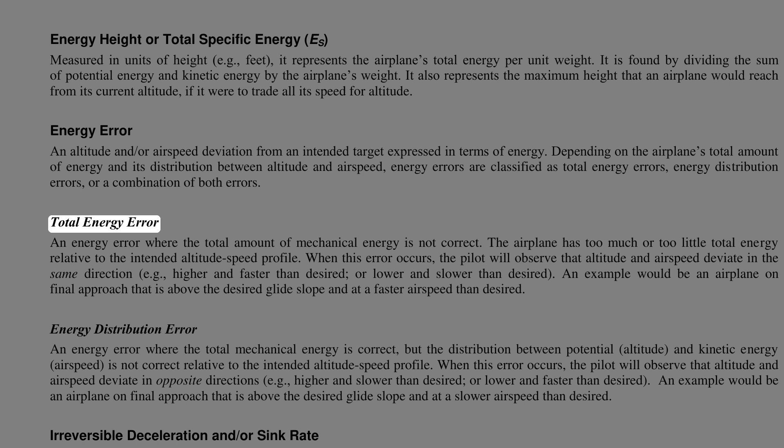Total energy error: an energy error where the total amount of mechanical energy is not correct. The airplane has too much or too little total energy relative to the intended altitude-speed profile. When this error occurs, the pilot will observe that altitude and airspeed deviate in the same direction, e.g., higher and faster than desired, or lower and slower than desired. An example would be an airplane on final approach that is above the desired glide slope and at a faster airspeed than desired. Energy distribution error...

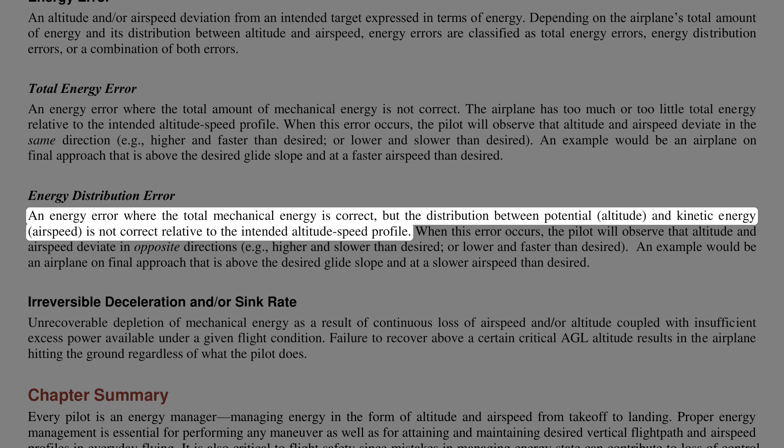Energy distribution error: an energy error where the total mechanical energy is correct, but the distribution between potential (altitude) and kinetic (airspeed) energy is not correct relative to the intended altitude-speed profile. When this error occurs, the pilot will observe that altitude and airspeed deviate in opposite directions, e.g., higher and slower than desired, or lower and faster than desired. An example would be an airplane on final approach that is above the desired glide slope and at a slower airspeed than desired. Irreversible deceleration and/or sink rate...

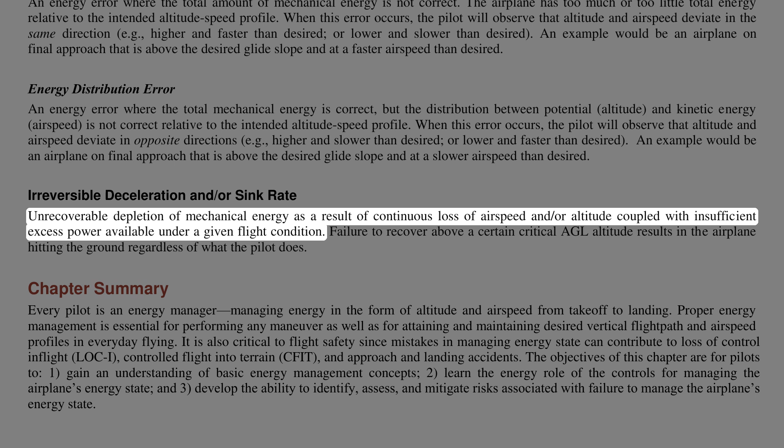Irreversible deceleration and/or sink rate: unrecoverable depletion of mechanical energy as a result of continuous loss of airspeed and/or altitude coupled with insufficient excess power available under a given flight condition. Failure to recover above a certain critical AGL altitude results in the airplane hitting the ground regardless of what the pilot does.

Chapter summary: every pilot is an energy manager, managing energy in the form of altitude and airspeed from takeoff to landing. Proper energy management is essential for performing any maneuver as well as for attaining and maintaining desired vertical flight path and airspeed profiles in everyday flying. It is also critical to flight safety, since mistakes in managing energy state can contribute to loss of control in flight, LOC-I, controlled flight into terrain, CFIT, and approach and landing accidents.

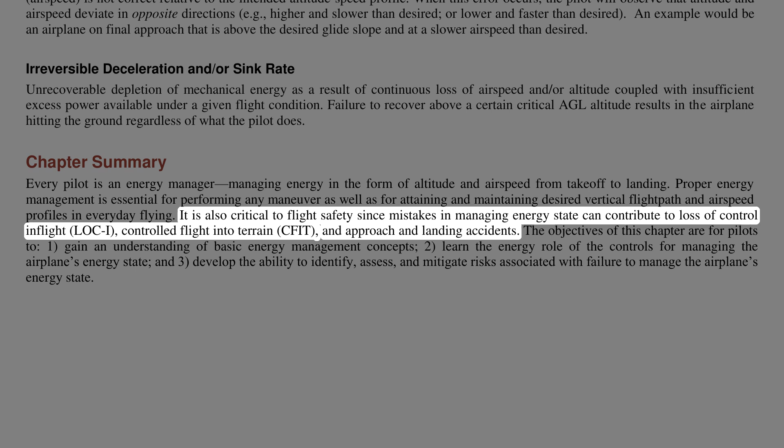The objectives of this chapter are for pilots to: 1. Gain an understanding of basic energy management concepts. 2. Learn the energy role of the controls for managing the airplane's energy state. And 3. Develop the ability to identify, assess, and mitigate risks associated with failure to manage the airplane's energy state.